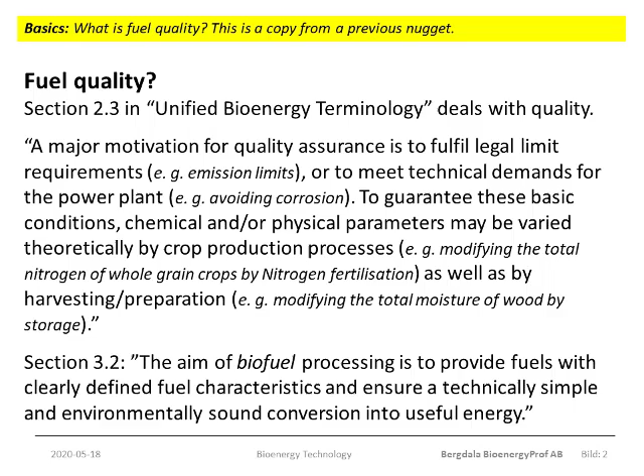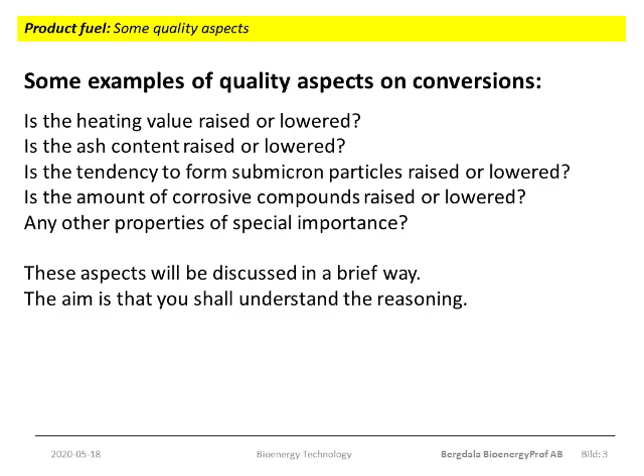On this slide, I've put up some things that will be brought up for discussion. And I will try to do it in a reasonably systematic way so that you grasp the underlying ideas. Remember, there are no definite answers to what a high-quality fuel is, but there will be a definite answer to the question if a fuel works well in a specific application or process. So the important thing is for the people in the planning group to ask the correct questions and to identify the correct aspects. And that is what I will try to introduce you to.

The physical processes to make biomass combustible or to influence the properties of the biofuel include mainly drying, milling and compaction. In these cases, there is no need for a secondary process. So these are one-step processes from which the primary product is also the final product. None of these processes will change the composition of the dry substance. So the heating value of the dry substance, as for the dry and ash-free substance, remains constant. But if the process involves drying, then the heating value of the moist substance will increase.

Drying, that is the evaporation of water, is very energy demanding. So for drying to be feasible from an expense point of view, the drying energy will have to be cheap, like sun and wind. For the same reason, the fact that the dry substance composition remains intact, the ash content and the ash properties will also stay the same in the final product as they were in the untreated biomass. So any formation of submicron particles or corrosive gases will remain the same once the fuel is actually used in the end-user process.

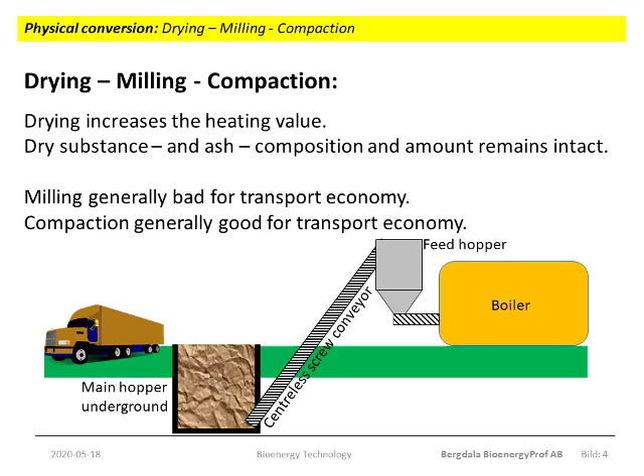So pellets, a nice fuel with uniform size, uniform density, constant moisture, minimal bridging problems, and on the whole a wonderful fuel, would not be a better fuel in that installation. Not because pellets is a bad fuel, but simply because it would not work. So this is the type of questions that I want you to understand that you have to ask when you're working with the planning of an energy system.

As for the chemical conversions performed at more or less ambient conditions, you will remember that the starting point was basically vegetable oils. If the oils are clean from the beginning, these processes will again be one-step processes. So the primary product may be sold as a fuel, unless the end user has some strict demands. If HVO is to be used in airplanes, for example.

Because if that is the case, you will have to separate out everything that might solidify at temperatures like -40 or -50 degrees. Many natural fats, and the liquid ones are called oils, tend to have lower heating values in the range 35 to 40 megajoules per kilo. This value will not be significantly different in the primary product, nor will the density change significantly, so the energy density will be similar when comparing the feedstock to the product.

If the feedstock is residual oils that may contain different types of contaminants, the oil will first have to be cleaned and filtered. Such a preparation will reduce the amount of non-combustibles and ash-forming elements. But in the basic process schemes, there is no process step to remove the ash components, so that is only depending on the pre-treatment. Now, pure vegetable oils are generally low in ash minerals, in chlorine, sulfur and other elements that may cause problems in combustion.

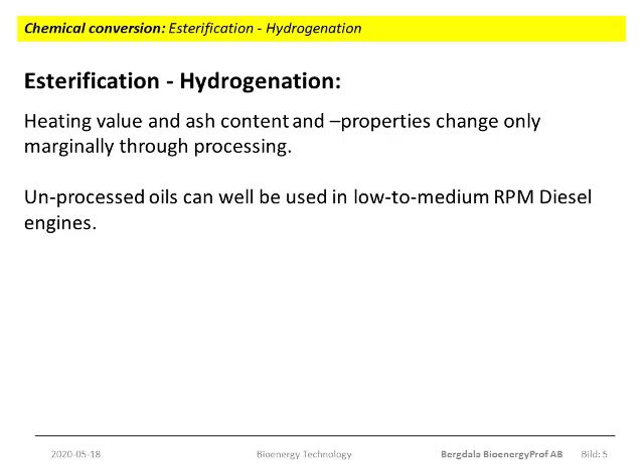Such engines will become heavy, and that is why this is first an option for stationary, small-scale heat and power generation applications. But then, if you want to make storable fuels for high RPM mobile engine applications, or if you want to allow the fuel to be stored, then you have to apply processing. As for the biochemical conversion processes, things are completely different.

These processes are usually performed using a feedstock that is actually a water slurry. So it is obvious that a conversion is necessary to get a combustible substance out of that. Both these processes are basically two-step. First there is a conversion, and then an upgrading.

Raw biogas may be used as a fuel in a local or on-site application, but if you want to sell it, store it, or inject it into a pipeline system or anything like that, then it has to be upgraded first. In the case of alcohol fermentation, the primary output will be an aqueous solution of ethanol in water. But what will also be in that water is anything that was present in the feedstock and that is soluble in water. So if there was sea salt, then sodium and chlorine will still be present in the fermenter output.

Or if there were water-soluble mercury salts in the feedstock, then the mercury will remain in the fermenter output. And any other water solubles will also remain in the output. So basically all elements that entered the fermenter in the liquid input will also leave the fermenter in the liquid output. And that represents the ash in this case.

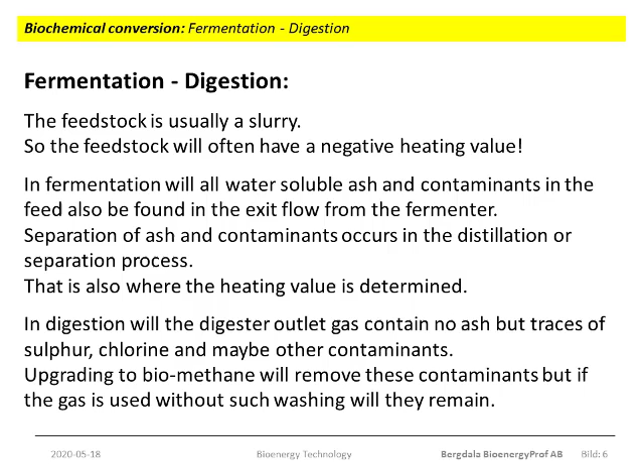For a commercial product, whether you want to inject it into the fossil gas pipeline system or you want to market it as a car fuel, you will first have to reach a methane content about or exceeding 95%, and then to meet quality criteria you will most often have to add a little propane to it. That gas, commercial quality biomethane or commercial quality biogas, is free of ash and free of contaminants.

As for fuels from pyrolysis processes, there are good reasons to distinguish between the products from a rough temperature perspective. You will know that this is not as simple as to say that charcoal is a low temperature process, pyrolysis oil is produced at intermediate temperatures, and pyrolysis gas is a high temperature product. But right now, I want to use that simplification anyway.

As for these processes, the torrefied material is immediately ready for sale. There is nothing more to do about the torrefied material. The primary pyrolysis oil is a water-rich mixture of different compounds and contaminants and must be purified prior to use or prior to commercial trade. The primary pyrolysis gas may be used internally on site, but if you would like an external customer to pay for it, it will have to be upgraded.

Torrefaction is performed at a low temperature, say 300 to 350 degrees. Already under these conditions about 50% of the chlorine and the sulfur may well be released in gaseous form. So what that means is that the solid product will contain less of the two contaminants sulfur and chlorine than the raw material did. The alkali metals, mainly sodium and potassium, together with other ash minerals, will remain in the solid product. Since there will be a weight loss because of the devolatilization, while the main part of the ash will remain in the solid, the ash content expressed as a mass fraction will increase.

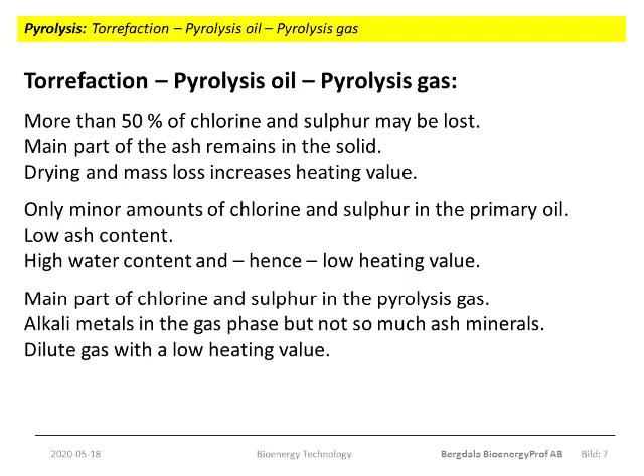Hydrothermal liquefaction produces a biocrude which is usually very acidic and has a high water content. Most of the calcium from the feedstock will be found in the crude oil, and so will potassium. The oxygen content in the primary oil is also too high for chemical stability, so the biocrude must be processed to become a commercial fuel. The yield will depend strongly on the process conditions, but total energy efficiencies exceeding 80% are reported.

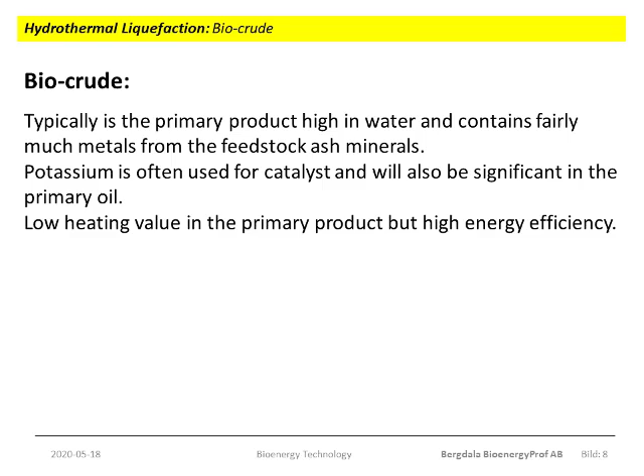Thermal gasification is, as you know, a high temperature process. The high temperature, that goes without saying, will vaporize anything that can be vaporized at the process temperature. This includes several chlorides, sulfides, and alkali metal compounds. So the product gas from a gasifier will generally contain most of the corrosive components from the feedstock.

Also the main part of the alkali metals, mainly sodium and potassium, will be present in the product gas. The alkali metals plus sulfur and chlorine are the components that build up a major part of the submicron fly ash particles. So the fuel gas produced in thermal gasification will actually contain a great part of the most problematic ash elements from the feedstock.

The fuel gas will also contain most of the water entering the reactor. Part of the incoming water will contribute to the char gasification, but parts will inevitably only act like an inert ballast gas. So if you want to use the primary producer gas as a fuel in anything that is sensitive to corrosion or to erosion, like a gas turbine or a high-tech internal combustion engine, then you will first have to clean the primary gas from ash elements and from corrosive compounds.

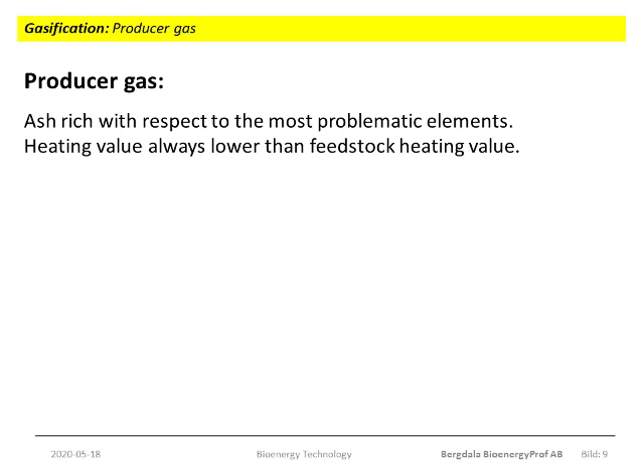The total mass flow to the gasifier is the solid material plus the gasification agents. These agents can be air or oxygen-enriched air, or pure oxygen, or steam, or oxygen plus steam. Regardless, the total outgoing mass flow is always equal to the mass flow of feedstock plus the mass flow of gasification agents. But the energy input is only that which is represented by the heating value in the solid fuel. So the heating value of the product gas is always significantly lower than the feedstock heating value.